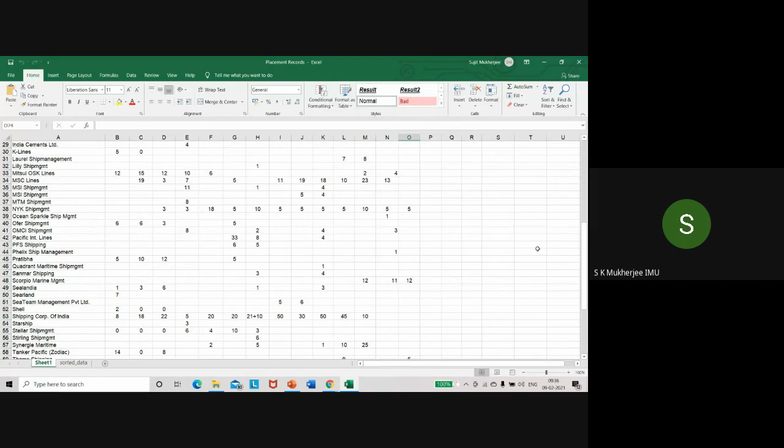Sorry boys, that was the director on the line, and he wants details about which companies are coming for campus interviews, because now higher authorities are continuously monitoring the placements happening. Placements are happening on the basis of vacancies, and number two, on the basis of availability. And there is a third element also on the competency of the students. So these are the three factors: number one is the vacancy, number two is the availability, and number three is the competency and caliber of the students that are available.

So right now the situation is very bad. One thing is the pandemic has caused a lot of issues in reducing the number of intakes. This has happened with everybody. Shipping Corporation of India used to take 40 to 50 boys every year, but now they have their own institution where they are training boys. They are earning money also from there, and they have their own students. This is going to happen with all major companies. All major companies will have their own institutions which will be arranging for engineering cadets. That is why they have stopped taking from our institution or any other institution. Situation is very, very tight.

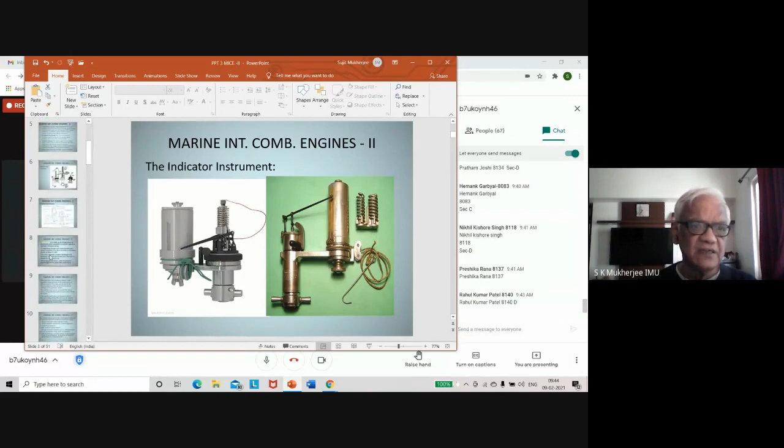So we were on page 9, let us go to page 9. Yeah, this is page 8, this is page 9.

Next, they will ask you what is the care and upkeep of such an instrument. So you'll have to say that we need to clean the passage where exhaust gases come, clean it with a cloth and then lubricate that passage, ensure that the link points are also lubricated so there is no stiffness during its functioning. And we also ensure that the coil spring inside is not stretched when it is kept in place so that everything is kept in order.

It has to be kept clean inside a designated box which is like a jewelry box. And apart from the instrument, you have other fittings which are listed in that paper: a spanner, then you have spare springs, different scale springs, then you have scales, then you have a lubricating oil can. So these are all the parts which should be there in that box. After 5-6 years, some of the parts are missing, as usual. So that is one thing you have to be careful about.

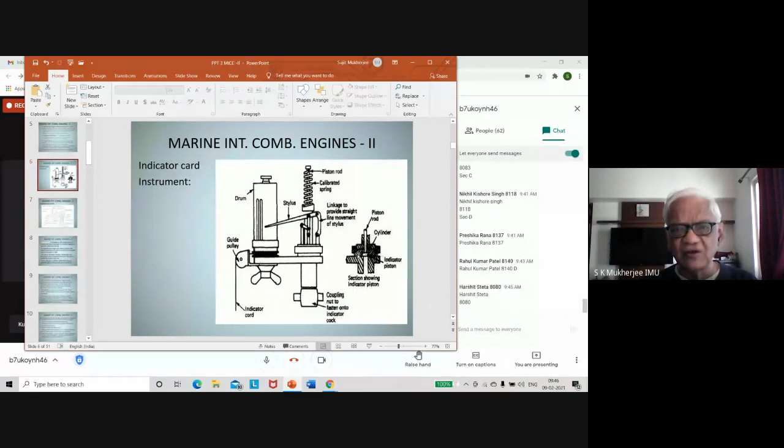And this is the diagram which you will possibly be asked to draw. So I have simplified the diagram as much as I can, and then I made it in a way that you can draw. I don't expect you to draw a diagram like this - this is not very self-explanatory. More self-explanatory is a sectional view of the piston area showing the piston rings and the spring.

So the springs are under compression stress here. Now to describe it, I have given some statements, which is what we shall read through - description of the internal of the indicator card taking instrument.

It is made up of a small piston of a known size which operates in a cylinder against a specially calibrated spring. A magnifying linkage with a stylus transfers the piston movement to a drum on which is mounted a piece of paper or card.

Let's look at the diagram again. So you have a spring here and a linkage which magnifies the movement of the stylus. That means if the piston moves 1 to 1.5 centimeters, this will move about 7.5 centimeters, almost 3 inches. This linkage provides for that magnification and also allows the stylus to move in a vertical direction. If this linkage was a simple linkage directly connected, it would move in the form of an arc, which would not be a straight line.

So that is why this linkage is a little special, to enable this point to move absolutely vertically. And on the drum you have a clip on which the paper is fitted, and the ends of the paper pass through these wire clips and are pulled tight, so the paper is tightly fitted onto the drum.

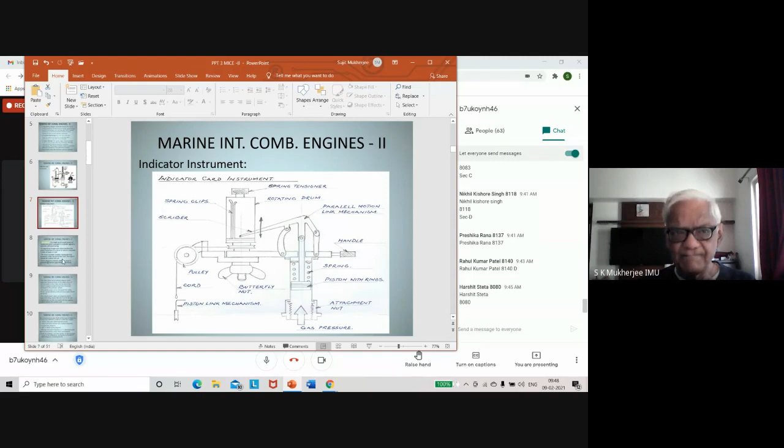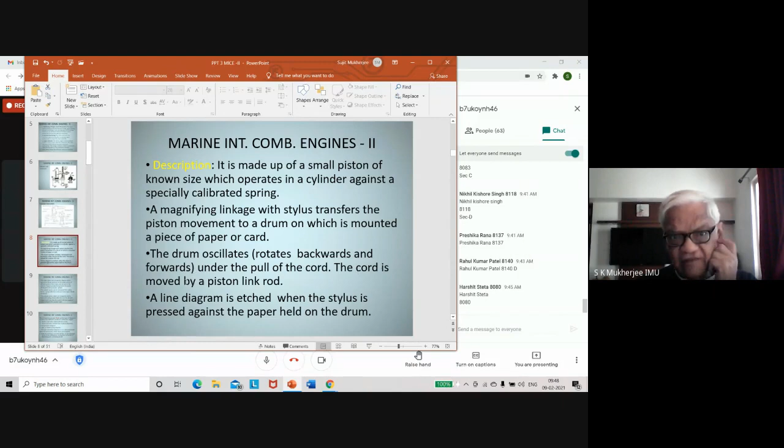The drum oscillates, meaning it rotates backwards and forwards under the pull of the cord. The cord is moved by a piston link rod. So this, what you see here, the drum, has got a wheel over here with a cord around it. This cord is passed over a pulley and pulled downwards. This pulley can be shifted, rotated around the drum depending on convenience of the indicator cock position and that piston link mechanism.

So to move that entire pulley, you have a butterfly nut, intended for finger operation only—you don't need a spanner. This nut can be loosened and this plate can be allowed to rotate relative to the drum. Once the pulley position is finalized, so that the thread goes directly above the piston mechanism, you tighten this nut. Then this cord is put as a loop over the piston link mechanism.

So right now, when the piston moves up and down, this link also moves in synchronized motion with the piston. That means this cord is being pulled in synchronized movement of the piston. In other words, the drum is rotating based on the piston movement.

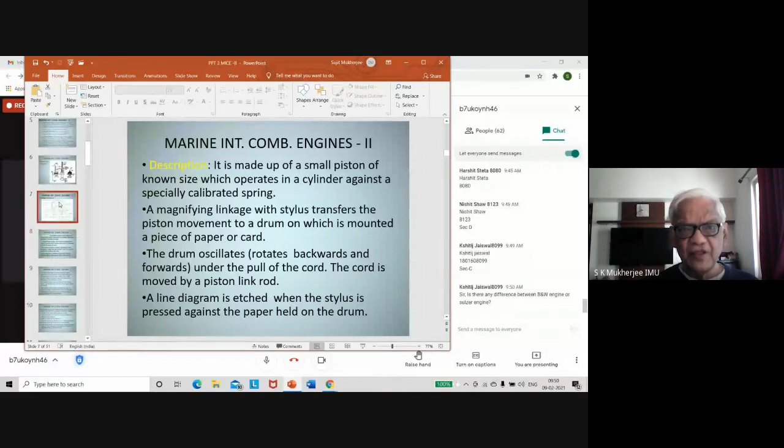See, the moment the piston is moving up and down, the drum is also rotating back and forth. Then with this handle, you turn so this spindle, this link mechanism, can be rotated. The moment it is rotated, it makes contact with the stylus on the paper which is on the drum, and this has to be only momentary because the movement is very fast, reasonably fast.

You just touch and let go, and immediately close the indicator cock. You cannot afford to keep the indicator cock open for too long, because the heat from the exhaust gases will make this part very hot. In fact, it becomes so hot you can't touch it with your bare hands—you have to wear gloves.

So what we do is wear a glove on only one hand, and with the other hand we operate this lever, which gives a better hold, a better feeling, a better sensitivity towards operating this instrument. To hold that hot instrument, you will need to wear at least one glove.

The moment the diagram is drawn on the drum, you need to pull the scriber off from that paper. Otherwise, it will keep going over that line repeatedly, and ultimately it will make a very thick line, or it will cut that paper.

That paper will get torn. So it has to be very gentle, very quick, and immediately close the indicator cock. This whole process of getting the diagram onto the paper should not take you more than 3 to 5 seconds. That is definite, without fail.

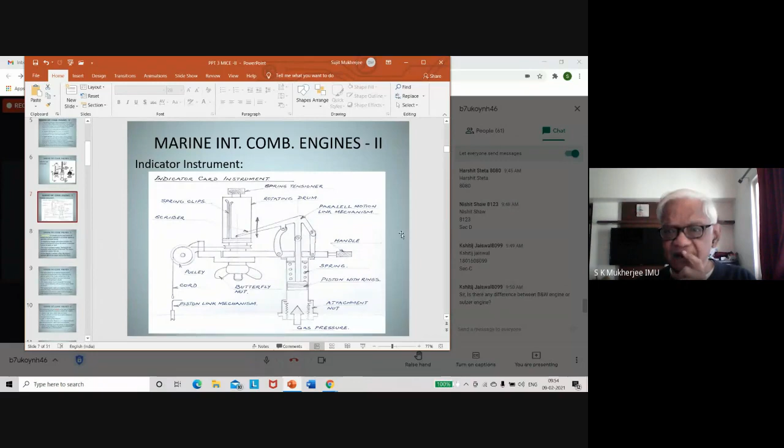Kshitij Jaiswal is not replying. Okay, so let's move on.

What we have now is the stylus. This is the description of what happens while taking the diagram. The stylus draws out an indicator diagram which represents the gas pressure on the engine piston at different points of the stroke. And the area of the indicator diagram produced represents the power developed in the particular cylinder.

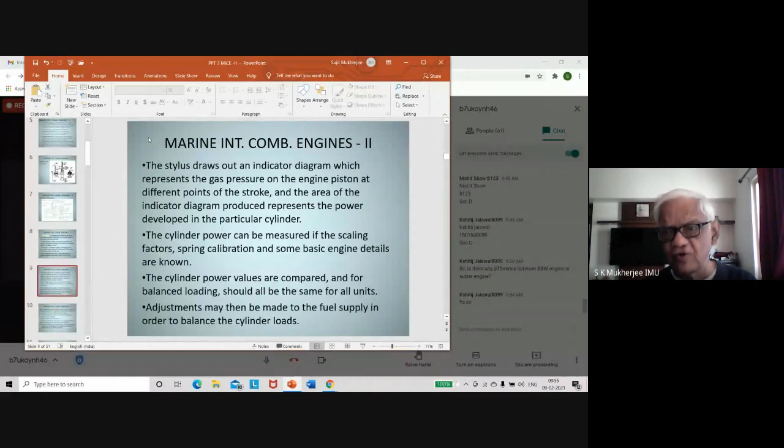I'm not going to allow this boy to come in, whoever it is. Let's see who it is - because he's come too late. Nilesh Kumar, it's almost 10 o'clock, 9:55. If I allow 5-10 minutes, it's okay, but after that you become a disturbance.

So the stylus draws out an indicator diagram which represents the gas pressure on the engine piston at different points of the stroke. That's why I told you the gas pressure which acts on the piston gives a varying movement of the stylus or the scriber. But the rotary movement of the drum is identical to the movement of the piston. Combining these two, you have the diagram. Because the stroke movement has to be shown, and within the stroke, what is the variation of the gas pressure inside the cylinder has to be shown - and this can be shown by that indicator diagram.

The cylinder power can be measured if the scaling factors - meaning all the scales of measurement - the scaling factors, spring calibration, and some basic engine details are known. That means diameter of the piston, stroke of the piston, RPM of the piston. These are used for calculating the power.

The cylinder power values are compared, and for balanced loading should be the same for all units. Ultimately, once we calculate the power from each, we may need to adjust the fuel pumps of some of them to make sure all units are giving the same power or near about the same power. It is not always possible to get the exact power from each unit - 1, 2, or maybe 5, 6 bhp differences will be there.

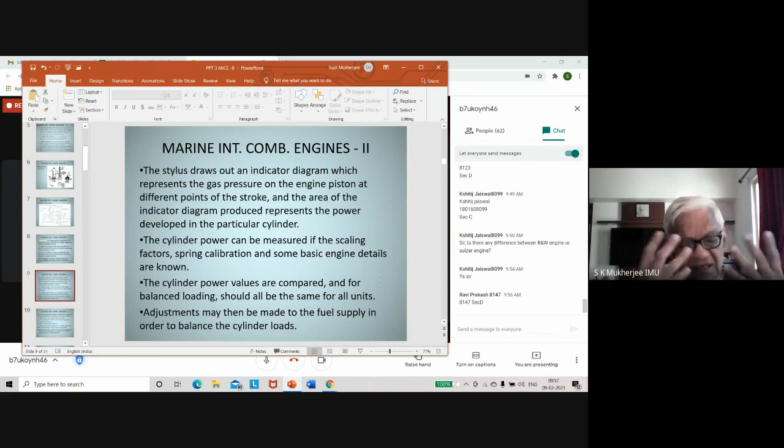This may be because of the resistance to movement of the piston, or the quality of one injector versus another - slight differences will be there. So the combustion process may be marginally different from each other, and there will be a marginal difference in the powers of all the units. But if all are within 5% of that range of power, it is considered a balanced engine.

Balancing is of two forms. One is mechanical balancing, where the inertia forces arising have to be balanced - that is the mechanical parts, which we discussed already earlier. The second one is power balancing, which means getting equal power from all the units. This can be done by adjusting fuel pump settings or cam settings, whatever is required, to ensure that the balance from each of the units is more or less the same.

The cylinder power values are compared, and for balanced loading should be all the same for all the units. Adjustments may be made to the fuel supply in order to balance the cylinder loads.

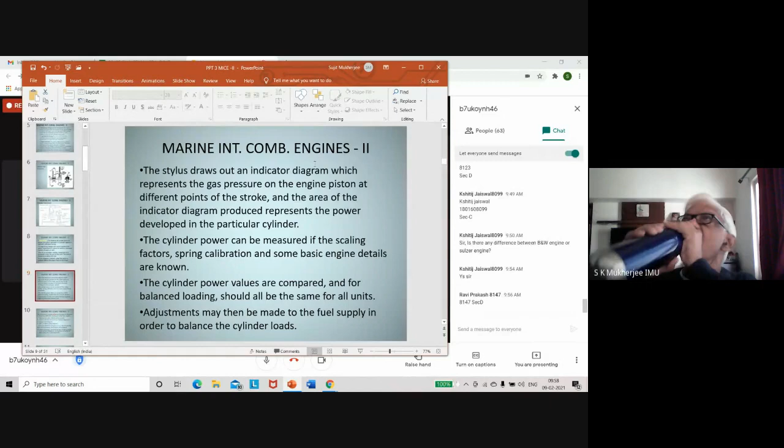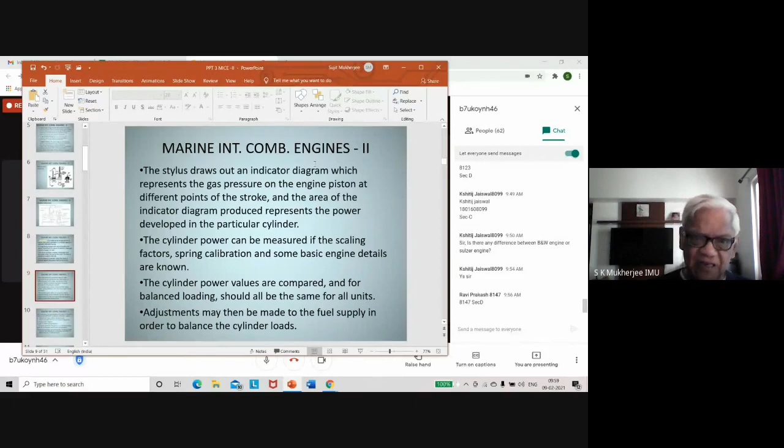See, you need to power balance, because if you do not have power balancing, then what happens? The stressing of the engine will be unbalanced. Some part will be more stressed, some part will be less stressed. Then this differential stressing will cause fatigue failure. That is why you need to have power balancing as an important arrangement.

Next, now we are coming into the diagrams. The instrument can give four useful types of diagrams to show four different conditions within the engine. There is a fifth one, which I don't find of any relevance on board the ship, and they don't ask us either. But it is there in theoretical books and papers. So we will consider only the four important ones: number one, power card, also called indicator card. The other ones are also cards, but they are not directly called indicator cards, they are called draw cards.

This draw card is also called an out of phase diagram. Out of phase diagram means the pressure indicated on the diagram is at a different moment compared to the position of the piston. In other words, the piston is always 90 degrees ahead of that diagram. If the piston is at TDC, this diagram position is shown 90 degrees before TDC. And when the piston is 90 degrees after TDC, this diagram will show the position at TDC. So it is 90 degrees out of phase, that is why it is called an out of phase diagram.

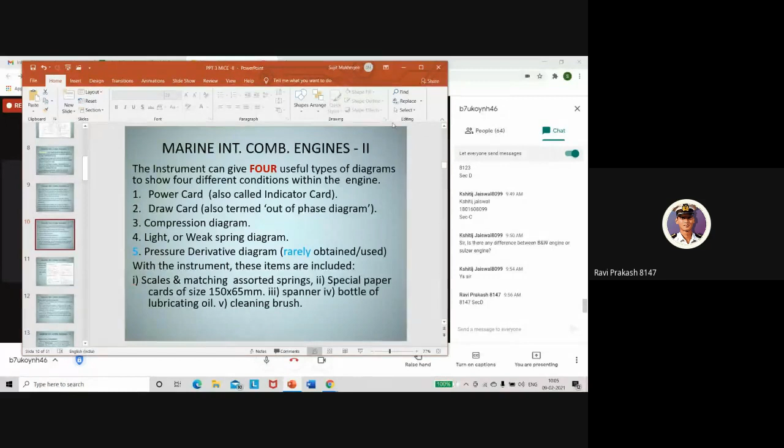The spring will get heated up, but you have to take it very quickly. This whole thing gets heated up. And the heating is how much? 80, maybe 70 to 80 degrees centigrade.

If it was a big one, then the quantity of heat coming in would also be very much, and the whole thing would have got heated very fast. But it is very small, yet very accurate. And the passage from the indicator cock has to be very clear.

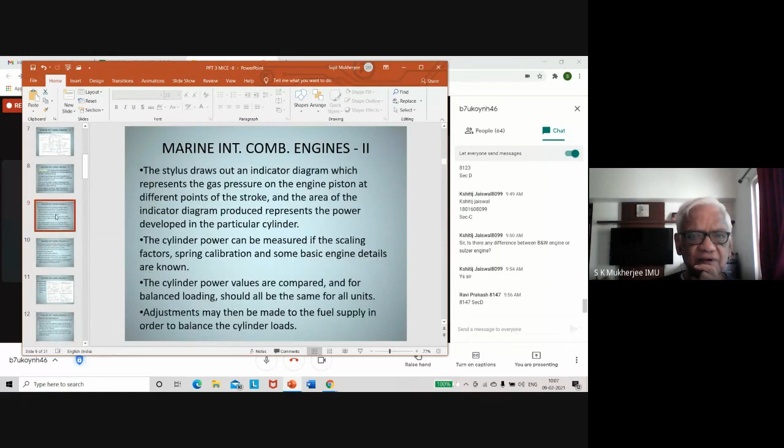All right, have you understood? Got it. Okay, so where were we? We were on, sorry, yeah, so we were on this one.

The light spring diagram takes the diagram at the lower end of the stroke, which means the exhaust, the scavenging, the return from BDC, and the pressurize part of the diagram is taken by the light spring diagram.

Along with this instrument, inside that box which stays with the chief engineer, it is like a jewelry box. The inside is lined with felt, soft cloth, similar to what you see in jewelry boxes. There are compartments made for the instrument to be based and supported over there. Apart from that, there is a place for keeping spare springs, a place to keep the scales, a place to keep the spanner, and a place to keep a bottle of lubricating oil. And of course, there is a cleaning brush.

So the items which are there with the instrument are scales and matching assorted springs. Sometimes you have 2 to 3 springs, but usually 2 springs are enough. One is for the light spring diagram, and one is for the other 3 diagrams: power card, draw card, and compression diagram. That one is common for all 3.

There's a special paper booklet, similar to your checkbook. Everybody has seen a checkbook. The papers inside will be slightly smaller than the checkbook, if I remember correctly. A checkbook is a little too big; this will be a little smaller, maybe 1 centimeter less on either side.

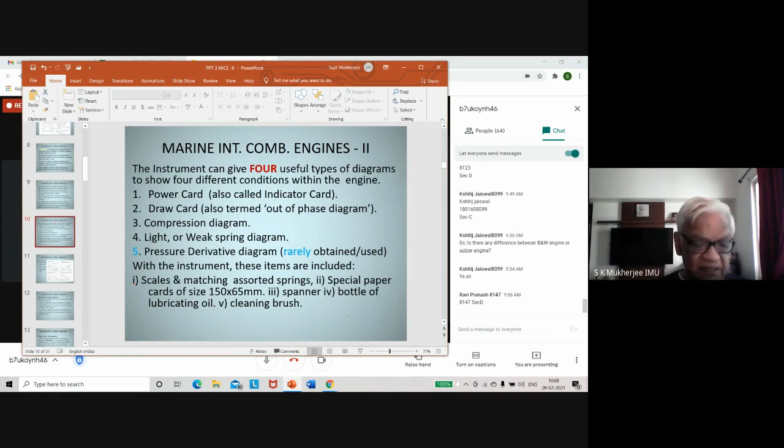So this booklet of special paper means it's really special. It is a little stiff, and on the surface you have a white coating. The paper itself is maroon or red colored, with a white coating on the surface. If you have a scratching device like a scriber or a pointer, you can make a mark on that paper, and that is what makes the diagram. There is no pencil or pen used. It is scratching on the paper that gives the diagram.

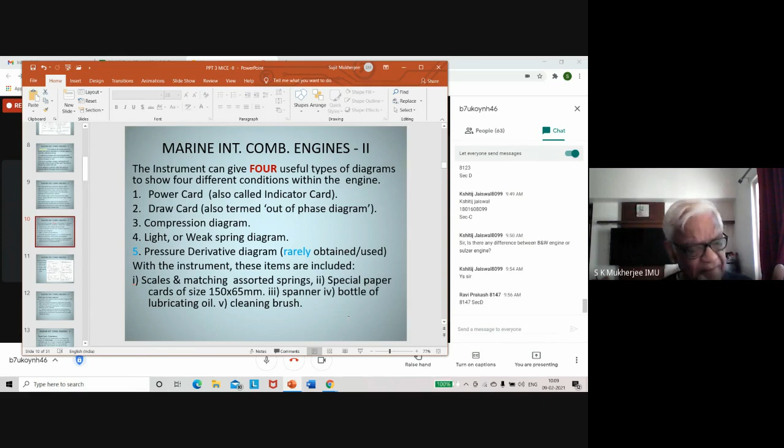You have to be a little careful in handling it, because if your fingers are oily, it will make patches on that paper, and ultimately those paper diagrams have to be sent to the office. Your caliber and competency is seen in how neat and tidy you are in making these diagrams, because they have to be dispatched to office. If they see a messy diagram, they will say this second engineer or chief engineer is no good.

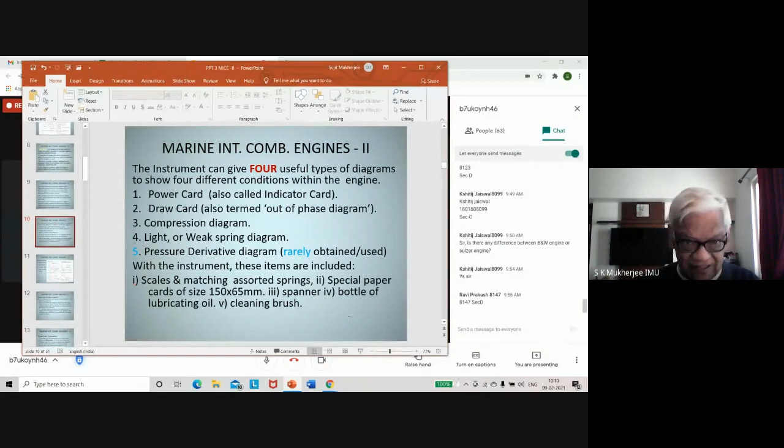He is very clumsy. A marine engineer has to be very precise minded. He has to be technically competent in handling instruments, machines, tools, everything. That is why we work with our hands. You have to be very good with your hands, and better than some of the technicians who come, because technicians are purely practical in the sense, if it breaks, they will fix it. Why it has broken, what is the solution, they don't think on those levels. You as an engineer will have to think on those levels, and also do a better job than him.

You have to be more than your subordinates when it comes to any work in the engine room, practically as well as theoretically.

If you are good in your work, believe me, you will be a king on the ship. Even the chief engineer will have a lot of respect for you. But you have to be very good and sincere. I have seen junior engineers command so much respect because they are genuinely very good, very sincere in their work. And sure enough, chief engineers become very, very dependent on them. So when they give them a job, he knows for sure that work will be done without a flaw.

If you can bring about that kind of confidence in your senior engineers, your life is set, not only on the ship, even after ship. He will give you a very good recommendation, and wherever you go, those recommendations will make a big difference. But ultimately, you have to earn that recommendation from your senior engineers by being very good in your work, very efficient, very responsible.

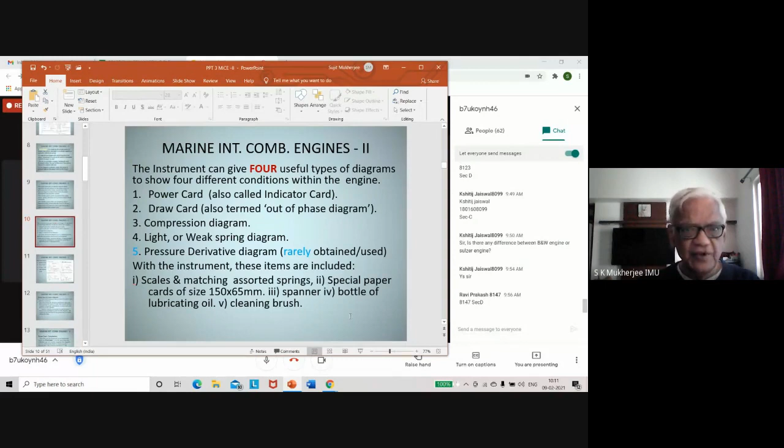So these are the items that you see inside that jewelry box which contains the instrument. Okay, let's go on to our next diagram.

Now the power card, I have further details on this diagram, but right now this is still an introduction to the cards. The first one is called the power card. When you draw that power card with the help of that piston link pulling on that cord and rotating the drum, it is purely a mechanical process of drawing the diagram.

You don't need much talent here. You need to be only quick and precise, in the sense quickly open the indicator cock, get the diagram, close the indicator cock. The drum can keep rotating as many times, it doesn't matter, but the duration for which the indicator cock is kept open has to be limited. Open quickly, take the card, close the indicator, and close it tight. So no more heating. Then you can take out that cord from that loop.

You can take out that paper from that drum and have a look at it after opening it out, and see the diagram has come like this, what you see. This is the diagram that comes out with the cord attached to the piston link. This is the indicator card, and this card is used to calculate the power of that unit.

See that scriber, it moves along this side when the piston is moving up - that is the compression line. As it compresses from here, the firing starts and the peak pressure rises, and thereafter the piston starts coming down, so this line becomes the expansion line. As it keeps expanding, it comes to a point where the exhaust port or exhaust valve opens, and then there is a sudden drop in pressure down to atmospheric level. Then again, after air comes into the system, compression starts, and it goes up again. So when you press the scriber onto the paper, it has to be momentary.

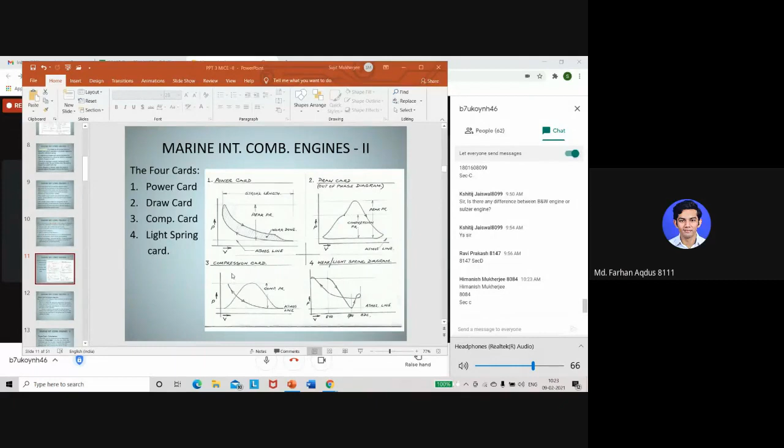Are you able to understand, Jaiswal, about the compression card? Yes. Okay, okay. No, sir, no sir. So what, no sir? Who is saying no sir? Sir, regarding the... yeah, compression card.

Okay, the compression card is taken with the fuel cut off. That means there is no peak pressure, only compression pressure. That means what the piston compresses is again the piston going down.

The pressure reached in the combustion chamber will be up to the maximum compression pressure. What you see in the diagram, there are actually two diagrams here. One is with the drum in rotation, because that cord is fixed to the piston link mechanism, so the drum is rotating. I press the stylus and open the indicator cock, and that time it will not give so much heat because there is no combustion.

There is only compression pressure, and that compression pressure is recorded by this straight line. What is being compressed is again expanding. We try to avoid the stylus going over it too many times because it might cut the paper, so just one or two times is enough. This is the line shown during compression and expansion.

Now, if I remove that cord and during a stroke pull the cord, much like what I did from my draw card, I will get a diagram like this, because there is no fuel injection, no combustion, no peak pressure — only compression pressure. So you will get a mountain like this. This value from the atmospheric line to the top of that hill is the compression pressure, and this must tally with all the other units as having equal compression pressure.

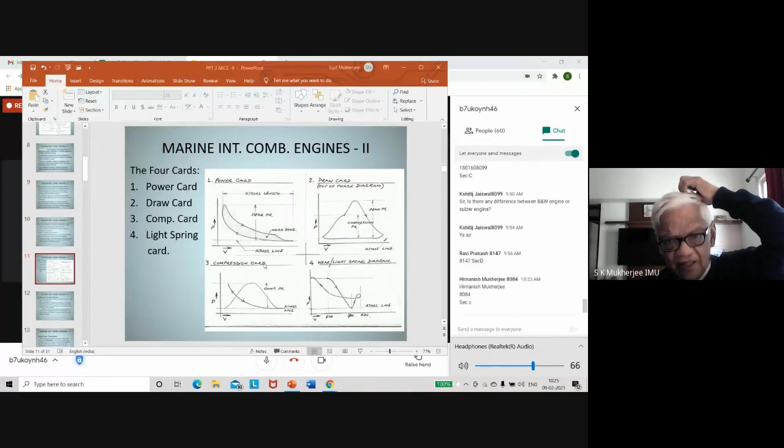You see this point where it drops — this pressure drop. What happens here is shown over here. This drop is shown by this line. This is the point where EVO means exhaust valve opens. It could have been exhaust port opens also — it need not necessarily be only exhaust valve, it can be exhaust port also.

So the moment the port opens, the pressure drops, the exhausting takes place, and it keeps dropping until the inlet port also opens. Remember, the piston is moving from the left side to the right side. The piston movement is on a horizontal plane, and as the exhaust pressure keeps going out, up to a point the inlet port — that means the scavenge ports — also opens.

The moment the scavenge port opens, the piston is still going down, and it will keep going down until it reaches BDC. But then the pressure inside the chamber will rise because the scavenge pressure will be coming in, pushing out the exhaust gases during that period. The moment the piston reaches BDC, there is a certain momentum of the air — it goes in, and a little bit does not go in. So there is a slight pressure drop over here, from this pressure to this pressure, because there is a stoppage in the flow of air into the cylinder. That is why you have a loop at the end.

Then the piston starts moving up and the air starts going out. It does not really compress because both your inlet port and exhaust port are open, so the piston keeps moving out without any compression. After it closes the inlet port, some of the pressure and air escapes from the exhaust port. After it closes the exhaust port, then the compression starts, and from this line your compression begins.

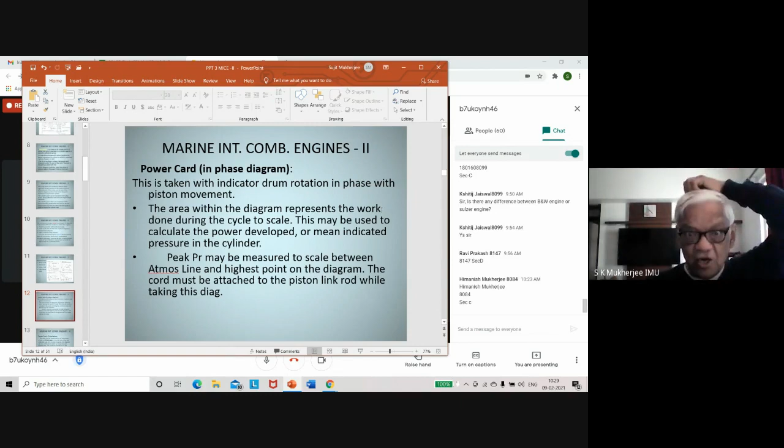So the area within the diagram you saw represents the work done during the cycle to scale, because you're using a spring of a certain scale and a piston of a fixed diameter, and the gas pressure acting on it will move the spring to a certain level. This may be used to calculate the power developed or mean indicated pressure in the cylinder.

Peak pressure may be measured to scale between the atmospheric line and the highest point on the diagram. So from the atmospheric line and the highest point on the diagram, you get the peak pressure, and that is also measured by means of a scale.

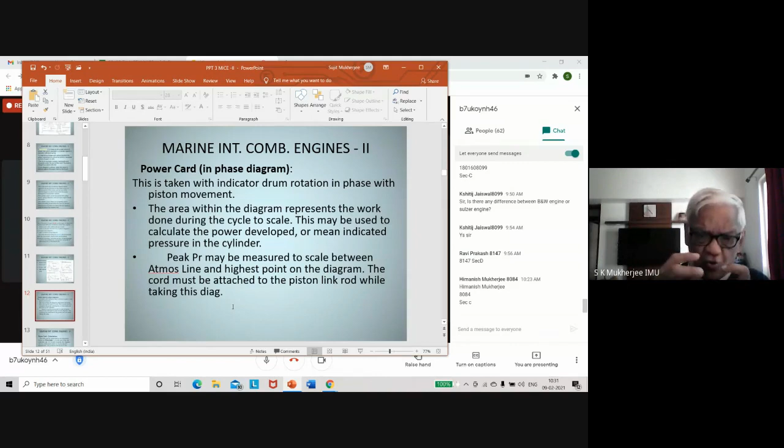The cord must be attached to the piston link rod while taking this diagram. I told you that cord — you make a little loop on it, and that loop has to be passed over the piston link mechanism, so that the cord is continuously pulled to cause rotation of the drum. This length of cord from that link to the drum is very critical, and you only get it through trial and error.

Rahul Kumar has a question: Sir, the engine is vibrating continuously, and sometimes the ship rolls and pitches — does that affect the graph?

Good question, same one asked by the previous section, section A. When you take these diagrams, the ship must be in calm waters, absolutely calm waters. There should be no rolling, no pitching, only calm. We never do this during bad weather, and we never do it when the ship is pitching or rolling, because at that time the power output from the engine is not steady. The power output has to be steady to take measurements.

If the power output is fluctuating, why would it fluctuate? If the propeller keeps coming up and down, out of the water and into the water, when the ship is pitching, then sometimes the power is too much, sometimes too little. So under those circumstances, we do not take power cards. We take power cards, draw cards, etc., only when there is a calm sea.

There's not a ripple on the water. Believe me, sometimes out at sea, everybody thinks the sea is very rough, but there are times when the sea is like glass, absolutely like glass — not a ripple. The only ripple being made is by the ship itself; you look back and there's a lot of ripples after the ship. But there are times when the sea is plain, like glass, no ripple, no wind. Those are ideal times, but of course you don't get that very often.

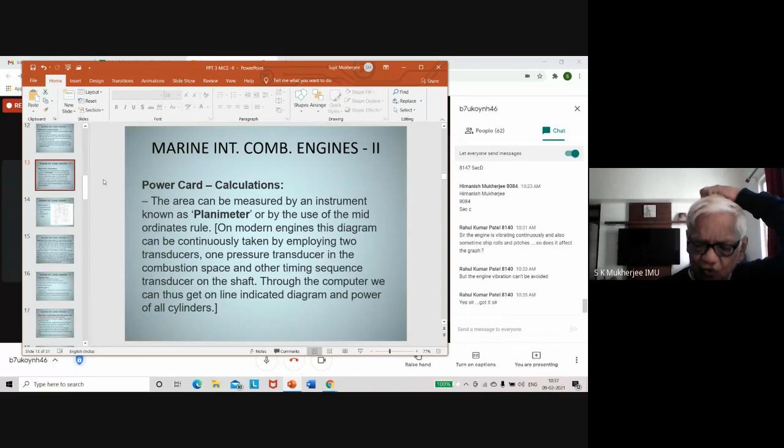But normally calculating the area under a curve or contained in a curvaceous area is a difficult prospect. So one method is mid-ordinate rule, second is using graph paper, and the third one, which we use on board, is called the use of a planimeter. The planimeter is also an instrument which goes together with the indicator card instrument - they come together because one is intended for the other and useless without it. This planimeter is also kept in a jewelry box in the chief engineer's cabin, under his custody and upkeep to ensure it's not damaged.

It's also a very delicate instrument, and let's read it before I explain further. The area can be measured by an instrument known as a planimeter or by the use of the mid-ordinate rule. You can't use the mid-ordinate rule on board the ship.

On modern engines, this diagram can be continuously taken by employing two transducers - one pressure transducer in the combustion space and another timing sequence transducer on the shaft. Through the computer, we can thus get the indicated diagram and power of all the cylinders.

Very simple - you fit one sensor on the combustion chamber and send its signal to the computer, which has its master controller, device and algorithms. Then another signal is required to tell you the timing, in other words the position of the piston when the pressure is at a certain variation. These two pieces of information fed to the computer will directly interpret into a diagram available on your screen, and at the press of a button it will also tell you how much power is being developed.

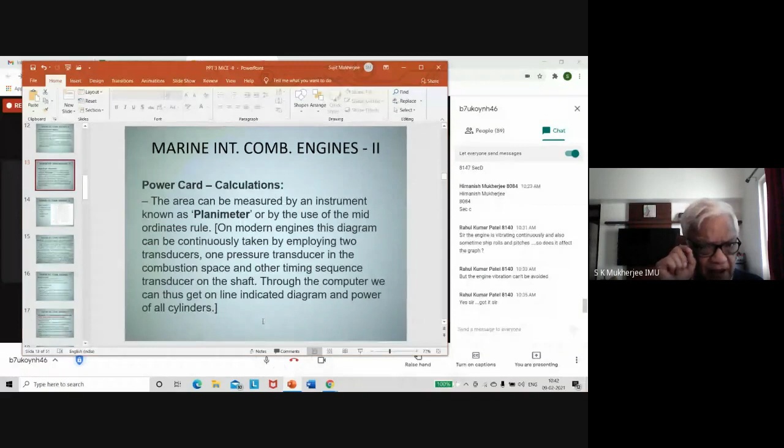I hope you understand the substitute to indicator diagrams. Here you have a sensor on the combustion chamber and a sensor on the crankshaft to identify that particular unit's position, relative to the gas pressure of that cylinder. Using this data, you can immediately get the diagram. If you want the draw card fuel injection also, you need to fit another sensor on the fuel injection pipe.

From the pump to the injector, with a pulse sensor. That pulse sensor is so accurate it will sense the beginning of the pulse, the mid stroke, and the end of the pulse. That means when the fuel has started to inject, at what rate it is injecting, and at what point it is completing - these sensors are so advanced. That sensor is also fitted, and next you can have the draw card also showing the complete injection process. So these are sensors which are very advanced, and they can be substituted for the indicator diagrams.

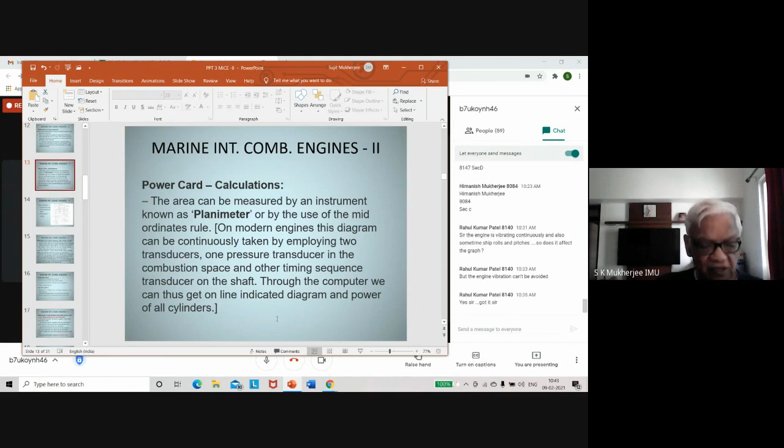But till today, indicator diagrams are still relevant and still being used, and they are also used in your examinations at MMD, because they have still not come into the area of asking questions with computer diagnosis of indicator diagrams or computerized means of assessing power. They don't ask questions on that, so you need to continue with this. I have given you some prior information also of other means besides the indicator diagram, the modern methods.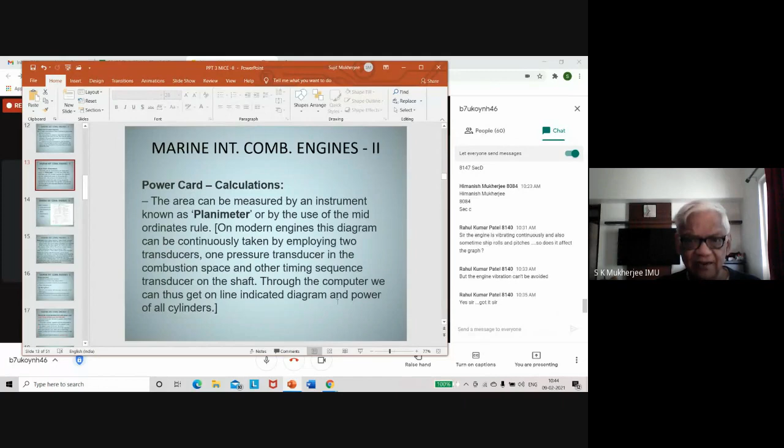Through the computer, we can get the online indicator diagram and power of all cylinders. This is the same diagram which I had earlier and the way it is taken - that was all about the power card. This is taken with the drum rotation in phase. You have understood how it is taken.

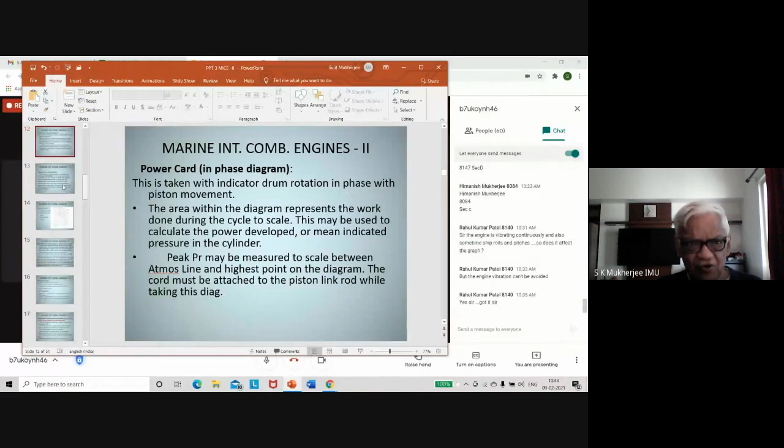Next is the draw card, also called the out of phase diagram. This is the card that is taken without the cord being looped onto the piston link mechanism. The cord has to be pulled by hand, and it is taken similar to the power card, but with the indicator drum 90 degrees out of phase with the piston stroke. You don't have to do anything - the drum movement records the condition inside the combustion chamber with the piston 90 degrees out of phase. That means the piston will always be a little ahead of what is shown on the drum by 90 degrees, which is a fraction of a second, maybe a second or fraction of a second timing difference.

Because when you pull the drum, the effect felt is exactly 90 degrees out. How it is 90 degrees, not 91 or 89, I don't know, but it is 90 degrees out of phase.

The cord is pulled manually by the engineer while pressing the stylus against the card on the drum. The diagram shows clearly the pressure changes during fuel combustion, fuel timing, or injector faults. At a later stage, we will be doing all the faults. Now where is the diagram gone?

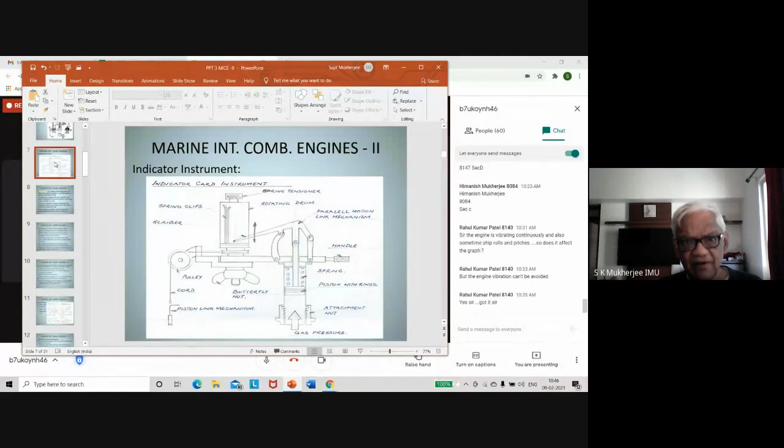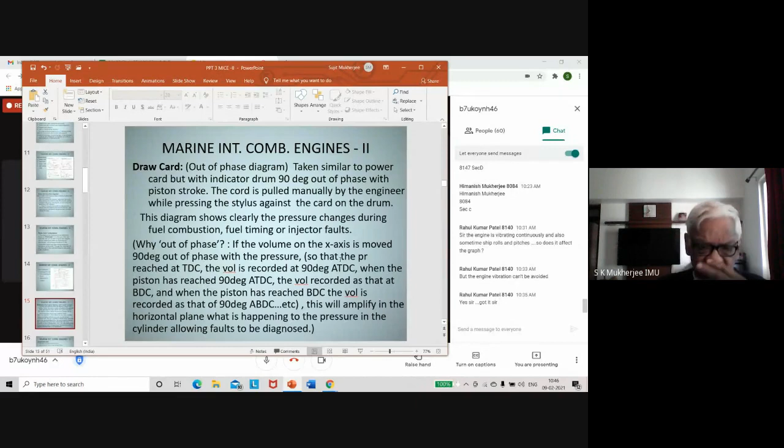Why out of phase? Why is it called out of phase? If the volume on the x-axis is moved 90 degrees out of phase with the pressure... I have a diagram in my diary, but it is not so much of relevance. Just remember that the status of display on the drum is 90 degrees behind the piston.

If the volume on the x-axis is moved 90 degrees out of phase with the pressure, so that the pressure reached at TDC, the volume is recorded at 90 degrees after TDC. Then the piston has reached 90 degrees after TDC - sorry, after TDC - the volume recorded is that at BDC. And then when the piston has reached BDC, the volume recorded is at 90 degrees after BDC.

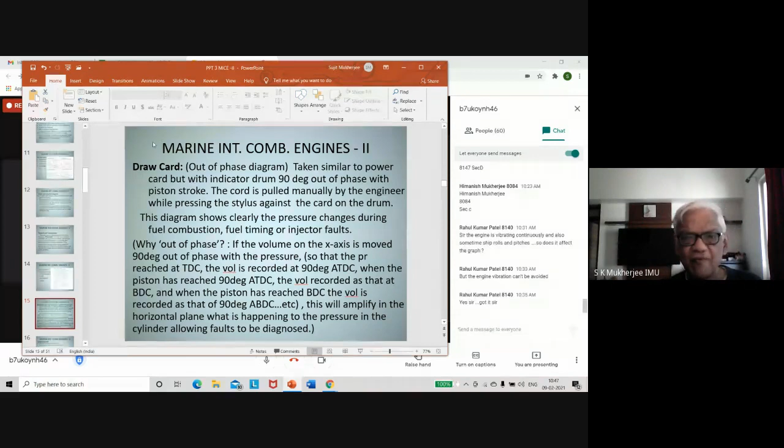This will amplify the horizontal plane of what is happening to the pressure in the cylinder, allowing faults to be diagnosed a little easily. So the display on the card is a little out of time with the movement of the piston. That is why it is called an out of phase diagram.

Now the compression card, this is the third one, is indicative of the compression pressure. The performance of the piston ring sealing is evident - that means whether your piston rings are in good condition or they are leaking, it will be told by your compression card. The integrity of the combustion chamber can be assessed.

That means how good the enclosure is, whether the indicator cock is leaking, whether the seating of the air starting valve is leaking, or the exhaust valve is leaking. So any leaks will be indicated by the compression card or compression pressure.

And this card is taken with the fuel cutoff. Obviously, you don't want to have the fuel cutting in to cause combustion, because your focus is only on taking the compression card - how much compression is taking place. And it should be more or less the same for all the units.

And the last card that we have is called the light spring card. It illustrates the exhaust and scavenge processes at the BDC regions - not exactly BDC, near the BDC regions, I will say. It is at near BDC regions, that means at the lower end of the stroke. It illustrates the exhaust and scavenge process near about BDC, whatever happens.

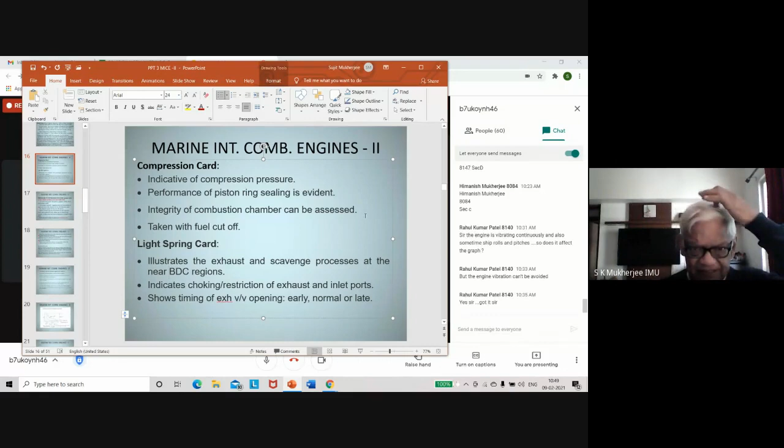It indicates choking and restriction of exhaust and inlet ports. If there is choking, then the gas pressure will not drop to atmospheric pressure, it will still remain held up. Also, it shows the timing of the exhaust valve opening - early, normal, or late.

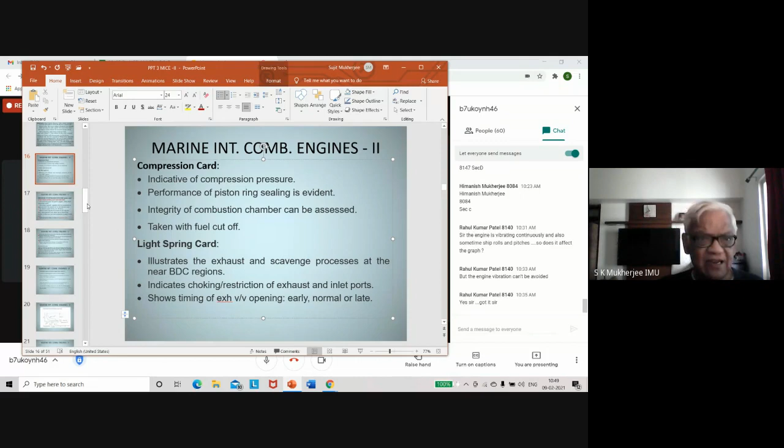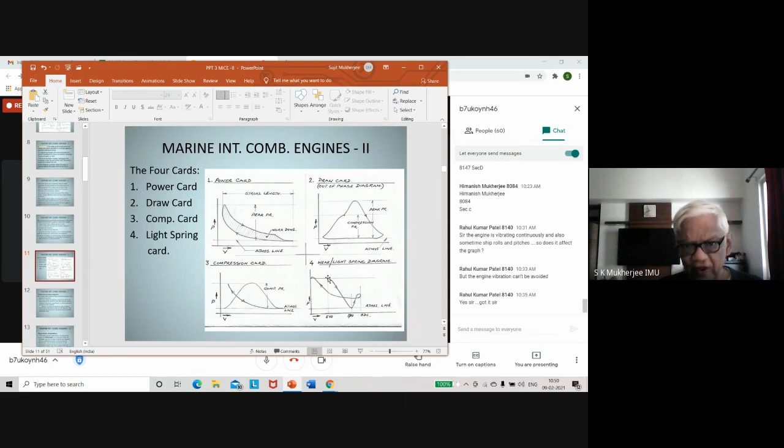In other words, the exhaust valve opening can also be varied to suit the whole combustion process. But in the case of a port, there is no scope of changing this point, because the port is fixed and the opening of the port will always remain the same. So exhaust valve malfunction in terms of timing can also be studied by this diagram.

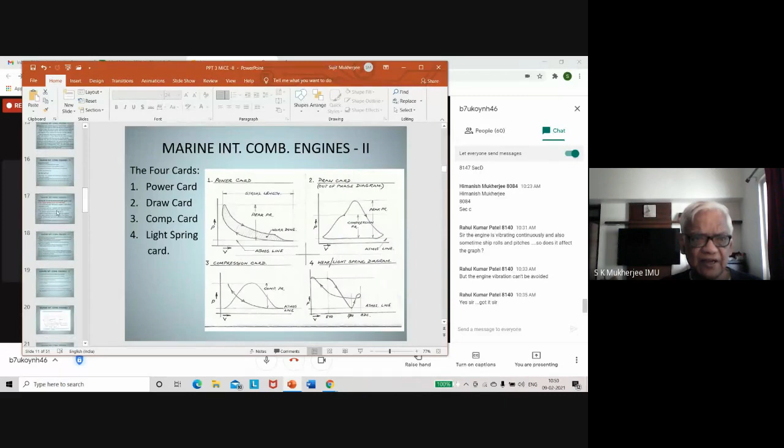Indicates the choking or restriction of the exhaust and inlet ports, and also shows timing of exhaust valve opening, whether it is early, normal, or late. Okay, so these are the four functions.

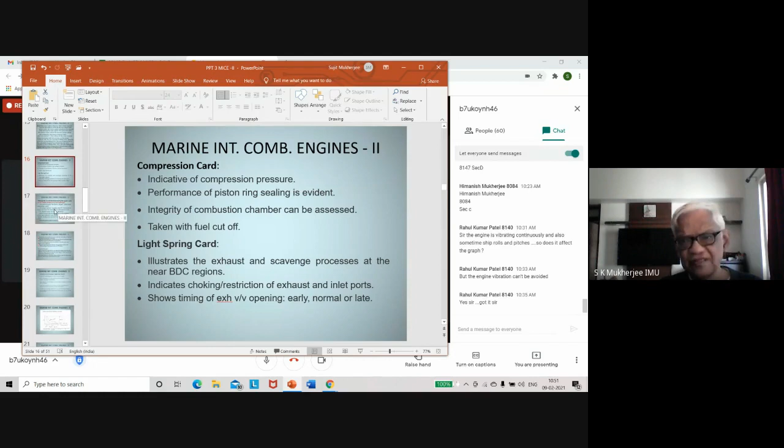Now here I've given you the procedure to obtain the indicator card or power card, to be taken during calm weather only. I think that helps in answering Rahul Kumar's question. But Rahul, you're asking the same question another section boy had asked. Same question.

That's all, there is so much vibration, so much movement - how will we take the cards? No, we will not take the cards when the movement is excessive inside the ship, by rolling or pitching. We will take it when the sea is calm and the ship is moving very steadily. Okay, I should have mentioned that.

Oh, I made a mention here. Actually, this mention I put it after he asked me the question. So this was not there before. So I put this after he made this question.

Okay. Milton Kumar Das - what is Sagar Sandesh weekly paper? Never mind.

Use protective gear like gloves, goggles, safety shoes, and proper outfit. Okay, for an examination you can write all this, but in practice they don't wear goggles for this. You don't need to wear goggles. Gloves, yes, I would suggest wear gloves on only one hand so you can hold that instrument.

With the other hand, you get a little better sensitivity in operating the instrument. Safety shoes is a normal practice while you're in the engine room. Proper outfit means you're wearing those boiler suits or overalls.

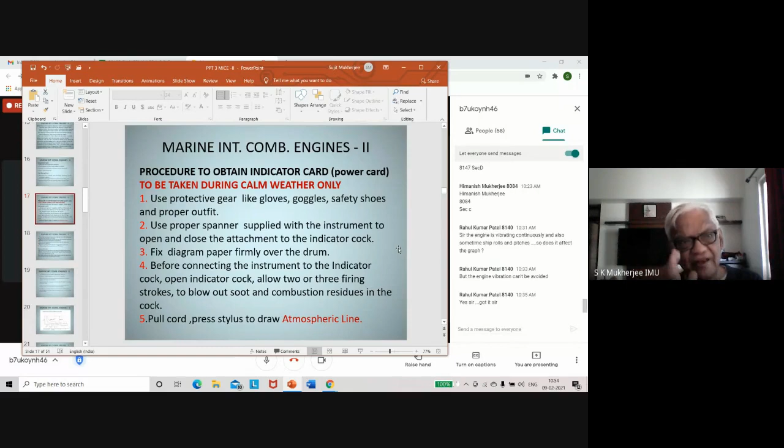I have reservations against such a statement. I would rather have the instrument in my hand, press the stylus with one thumb and pull the cord with the other hand to get the atmospheric line. What is the atmospheric line? It is the atmospheric pressure acting on the top of that little piston over there.

Now if you fit that instrument on the engine, on the indicator cock, and then draw the card, there is a possibility of a small leakage from the indicator cock acting on that piston. So the position of the piston, and thereof the stylus, will be a little different. So the atmospheric line that you draw will not really be atmospheric pressure - it will be that leak-off pressure from the indicator cock.

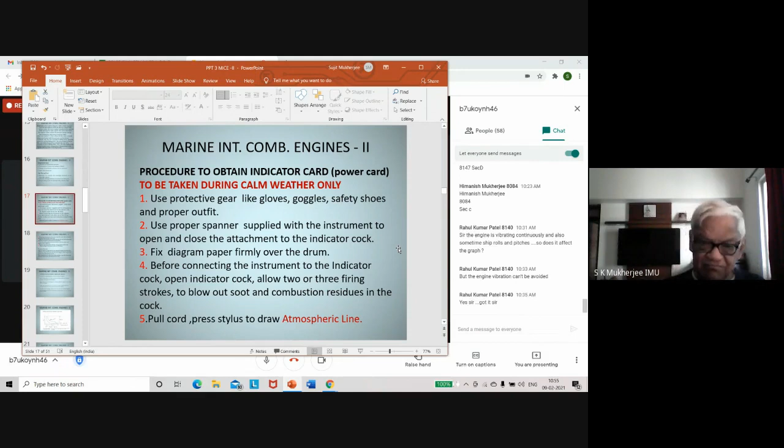So it is best to draw that atmospheric line when you hold it in your hand. In other words, atmospheric pressure acting on that piston positions the stylus. When you pull the cord, it will draw the real atmospheric line, so no error. But the other way, if there is a mistake in the atmospheric line, then your peak pressure is also incorrect, your compression pressure is also incorrect, and your calculation for the power is also gone. So always draw that atmospheric line when it is in your hand.

Fix the diagram paper firmly on the drum. Before connecting the instrument to the indicator cock, open the indicator cock, allow 2 or 3 firing strokes to blow out the soot and combustion residues in the cock. Pull the cord, press the stylus to draw the atmospheric line - this is what the book tells you.

But I would suggest that - after fitting the paper, I will have to change this - after fitting the paper on the instrument, immediately draw the atmospheric line. So I will change the sequencing of this procedure of taking the indicator card.

And you can write also in the exams, if you wish, that it is better to draw the atmospheric line when the instrument is not fitted on the indicator cock, to avoid any possible errors arising out of a leaking cock. That leakage may be very small - you cannot see it, you cannot feel it, but the pressure outlet will be there. Okay, I hope you have understood what I said.

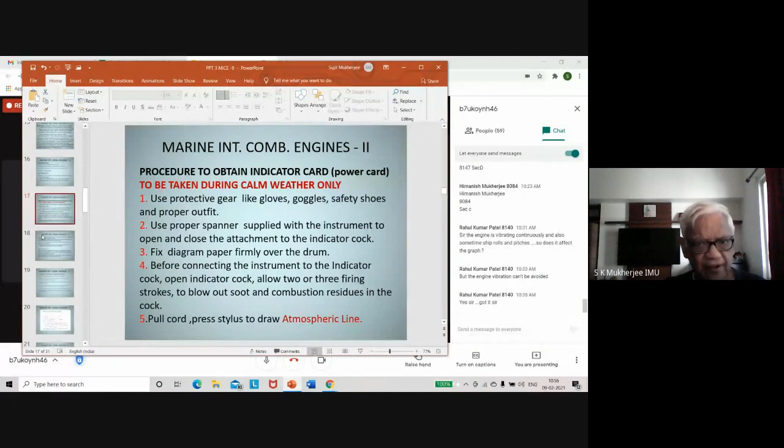Next, fasten the instrument to the cock so that the cord is able to hook up with the piston link rod and remain taut. That means the cord must be a little tight, so the drum will have rotated a little bit, not much. That is why I keep saying the length of that cord is a very critical factor. On the ship, after we finalize the length of the cord, we make a loop and make that loop permanent. So the next time we take the indicator card diagram, all we have to do is fit the loop immediately, without measuring whether the cord is the correct length.

With the cord hooked up to the piston link rod, the drum will rotate back and forth in sequence with the piston reciprocation. How many times it rotates doesn't matter. There is no heating involved, so the drum can keep rotating.

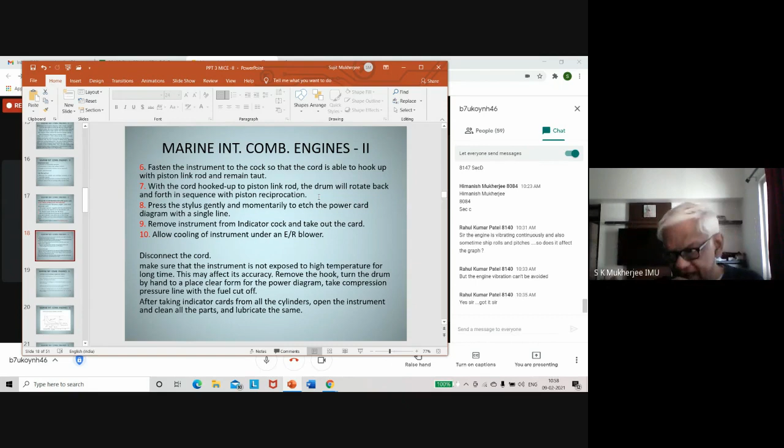Now, be ready to take the card. The moment you open the indicator cock, the piston inside starts moving. At that time, you press the stylus and take it off again, and close the indicator cock very quickly. Press the stylus gently and momentarily to etch. Etch means to scratch the power card diagram with a single line. Then close the indicator cock immediately.

This is to avoid overheating of the instrument, because it's not only one unit you're taking readings from, but maybe 7, 8, or 9 units. So you cannot afford to overheat it and then wait half an hour for it to cool down before taking the next one. It has to be reasonably cool to keep taking readings one after another. You can't spend 3 to 4 hours. Within half an hour to 45 minutes is the time limit for taking all the cards. That is the maximum time, because the sea conditions, current, and weather can suddenly change, and then everything goes haywire.

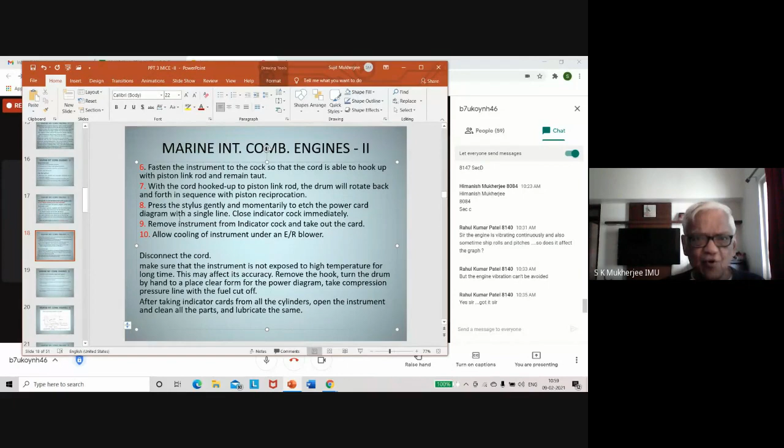Remove the instrument from the indicator cock and take out the card. Allow the instrument to cool under the engine room blower. Next, disconnect the cord. But how can you? You have to disconnect the cord well before removing the instrument.

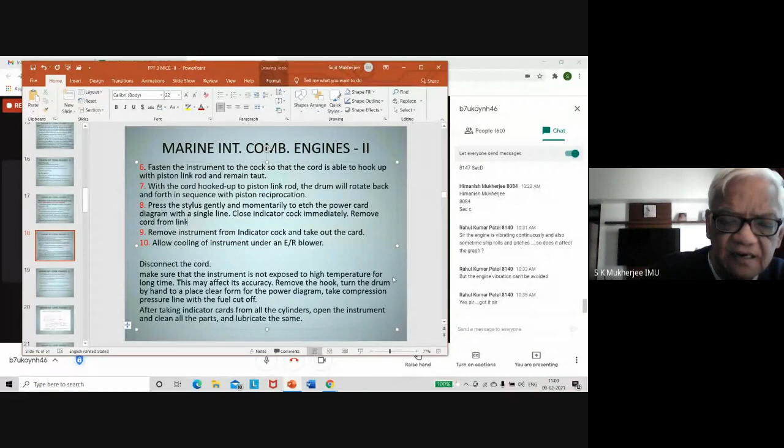Anyway, before you remove the instrument, press and close the indicator cock immediately, then remove the cord from the link. That helps - close the indicator cock and remove the cord. That makes more sense: remove the instrument from the indicator cock and take out the card.

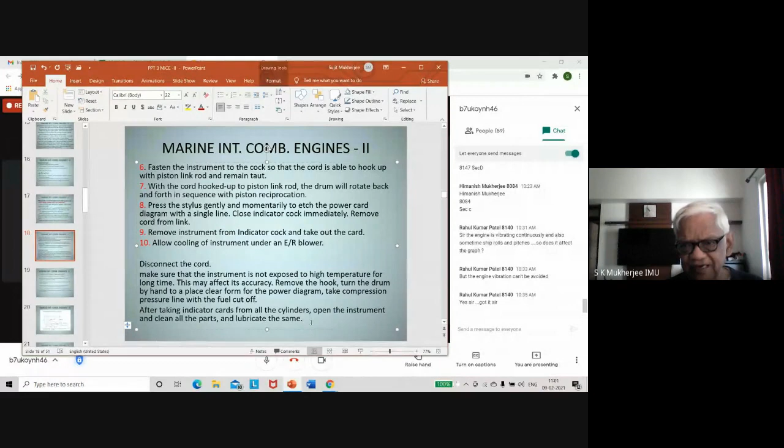Allow the instrument to cool under the blower. Make sure the instrument is not exposed to high temperature for a long time, as this may affect its accuracy. Remove the hook, turn the drum by hand to place a clear form for the power diagram, and take the compression pressure line with the fuel cutoff. After taking indicator cards from all the cylinders, open the instrument, clean all the parts, and lubricate them. That means all the parts will have to be cleaned before you put it back.

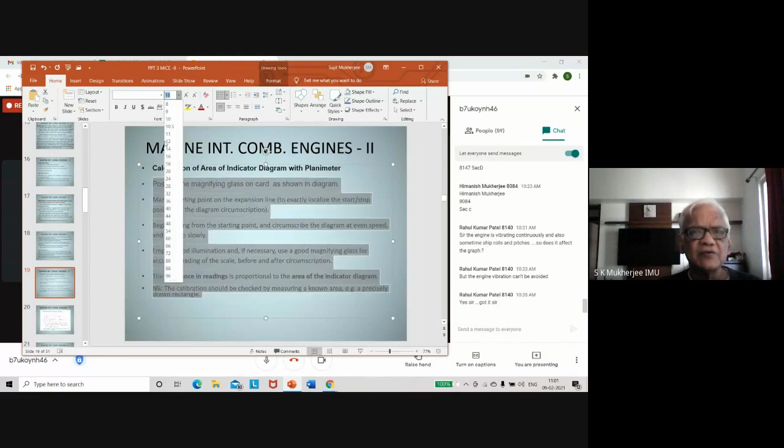Now, calculation of the area of the indicator diagram with the planimeter. I wish I could have made it a little bigger. Let's make it 18, 20.

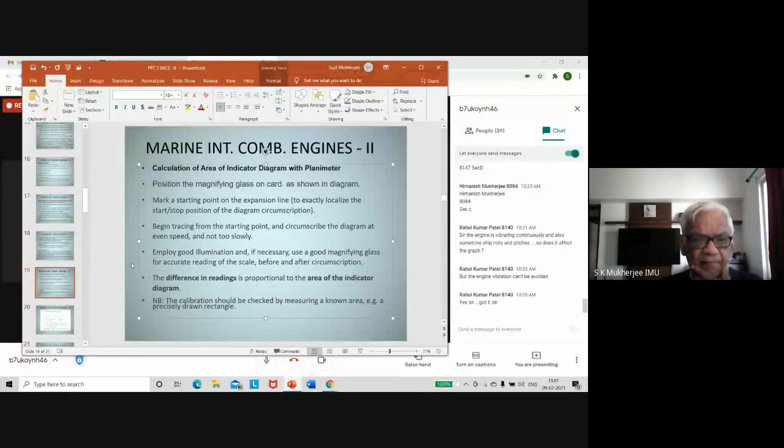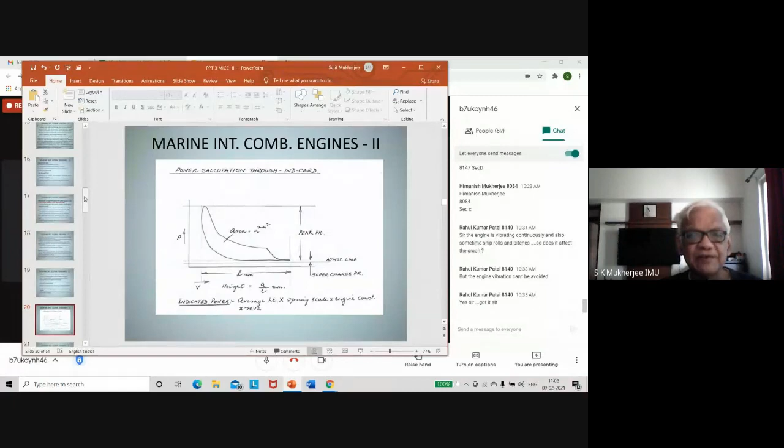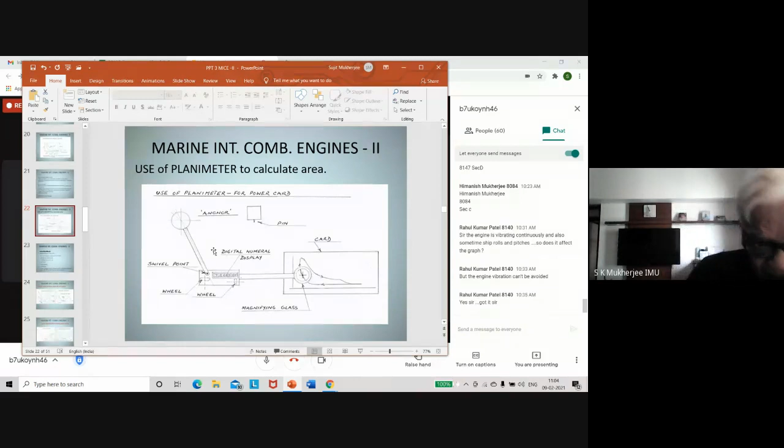Maybe modern chief engineers will be having a battery operated digital display, electronic device, but I would still trust the mechanical ones much more.

So on this box itself there is an arm which holds a magnifying glass. This magnifying glass is quite a big, thick glass, and at the center there is a cross. The cross is to identify a point. So when you move this magnifying glass anywhere, this wheel will also move.

As this wheel moves with respect to this arm, the digits inside will keep changing, and as it keeps changing, it records the area that it has covered.

Now under the magnifying glass you're supposed to put in that paper, the indicator card paper. That paper card can be held by means of a scotch tape or a drawing pin, to hold the paper in place.

On the card itself, on the line diagram, you make a reference point. On this reference point is where the cross of the magnifying glass will rest, and then you take the reading on the digital display and record it somewhere. Say 5621 - that is recorded.

Then you start moving the magnifying glass along this line of the diagram completely to the end and come back to that same point. Then you take a second reading of the digital display. The difference between the earlier figure and the second figure will give you the area of that diagram.

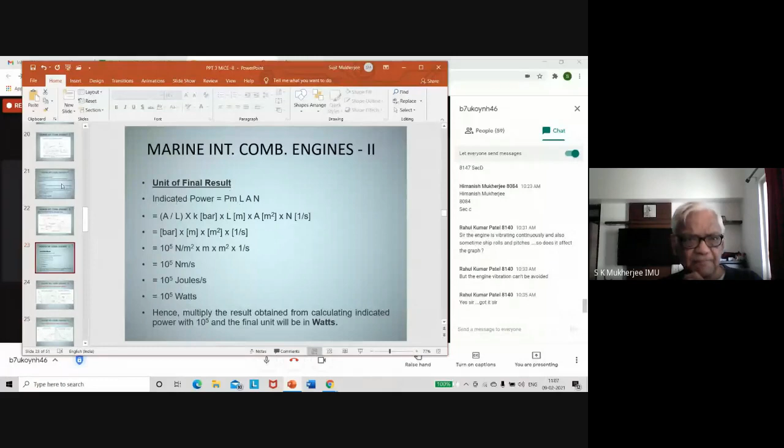Okay, today we will keep a close for this. Let's finish this page also. So unit of the final result, indicated power is... sorry, no, we cannot come here, we have to first go here, or even before that.

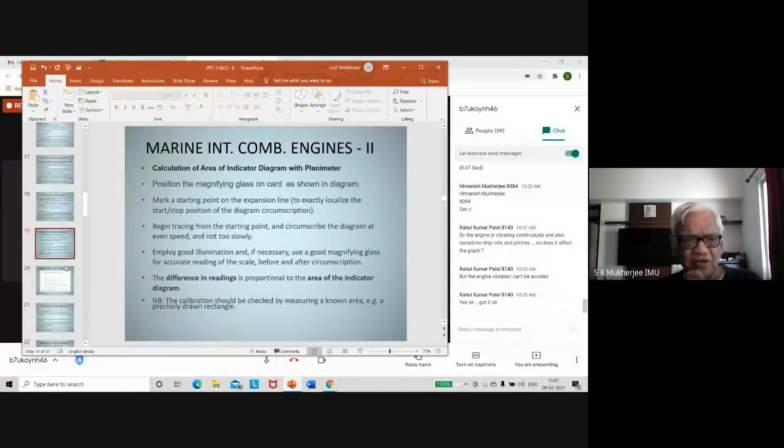Calculation of the area - I only wanted to give you the picture of the planimeter, just to understand what is the planimeter and how it is used. We will go into the calculations again from scratch in the next class.